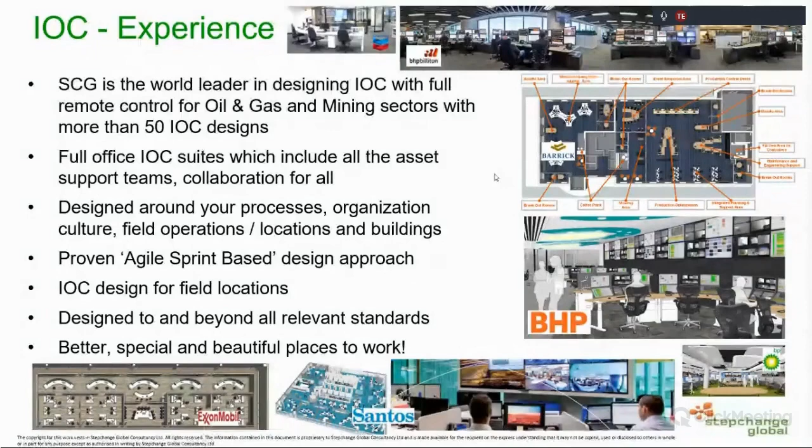I won't go through this too much, but we've done a lot of these centers globally, worldwide, a lot in Australia, a lot in North America. And as you can see, there's a number of them which are mining centers in BHP and Barrick. Some of these centers can be 1 or 2 floors with 200 people working in them. Some of them can be very small centers with 10 or 15 people in them.

At one end of the spectrum, they can cost millions of dollars, or even tens of millions of dollars. At the other end of the spectrum, they can cost as little as $100,000 or even less. In fact, the smallest one we've done is this one here with Huntley, for a company that currently only has three wells. So they've decided to set their entire company up around this concept.

So really, what is integrated operations, digital mine of the future, whatever you want to call it, digital transformation? Well, it's about taking these digitally enabled technologies—high bandwidth comms, Internet of Things, cloud, mobile worker, analytics, robotics, automation, etc.—and applying them to your day-to-day operation.

How do you apply them to production optimization? How do you apply them to asset integrity? How do you apply them to quality, water management—the normal day-to-day processes that you have when you're running a complex mining operation or a complex oil and gas operation? Really, they are enablers for things like operations excellence, production excellence, remote operations and management, collaborative working, and all those things that we do in a day-to-day operation.

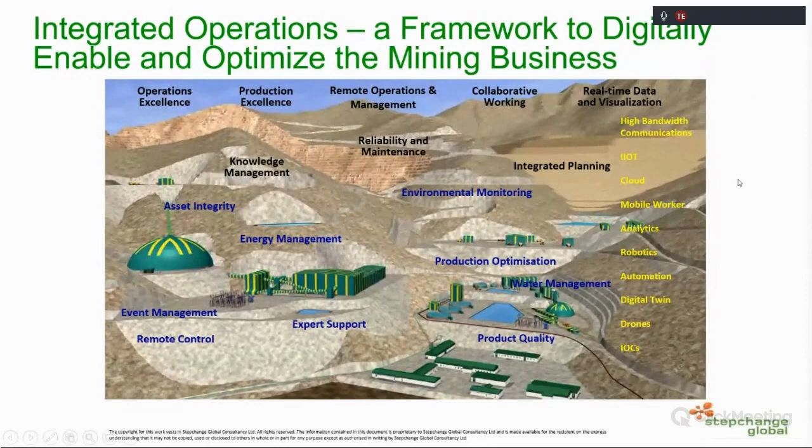But when you look at this and you boil it down, you say, well, what's fundamentally the change in the way of working that you have? That change in the way of working is a number of things. If you apply these technologies to an operation, and if you walked in through the door or visited the operational site, what would the changes be that you would notice?

One is that decisions—you're moving to a real-time or near real-time way of working, and decisions will be made faster rather than they would have been in a non-collaborative, non-data enabled operation. We would see that there is real-time connectivity between one or more remote sites and teams working together over geographical distances. So the geography goes away.

We tend to see that there's a move towards multidisciplinary team working, so that a production optimization team would be pit to port, and that is inherently multidiscipline, and those teams would be co-located with all of their data feeds, optimizing that production chain, and that really leads to value chain integration and optimization.

So what we see is it speeds things up, it connects remote teams, it moves towards multidiscipline, it integrates across the value chain. And this is quite a big change in the way of working for your people on the ground, who are often isolated in silos and not used to collaborating in this way. So that's why this is a change problem—it's not just a technology problem, it's a change problem.

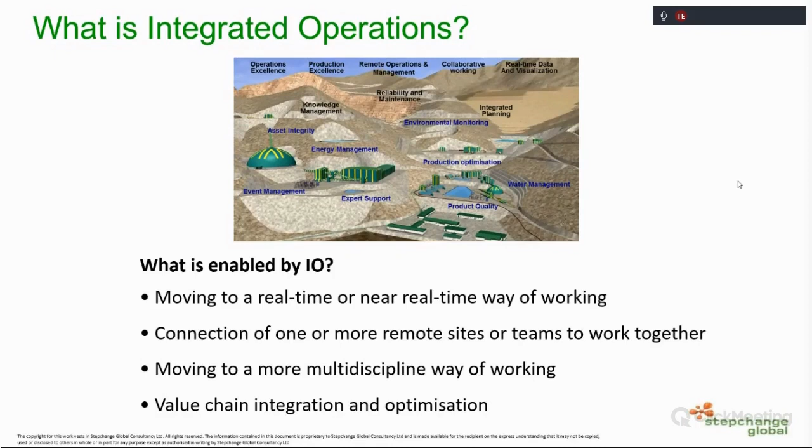What are the drivers and what are the enablers for doing this? Well, we see that the drivers are things like: mines and oil and gas are increasingly in remote locations where you don't have a lot of people to work there. There are particularly key skill shortages in certain areas. There's increasing technical and challenging nature of the operations and new developments.

Of course, you're trying to potentially grow your business, so how do you scale your business with the same number of people? You're looking for performance improvement, production efficiency, reduction of cost base, of course. You've got other things like high and low commodity price and the whole HSE and environment issue there, and that's driving us towards a digital type of operation.

And of course, the enablers are a whole lot of the technologies which I've already talked about. But we also see that an enabler is new supply chain management models, new operating models, new project concepts, and new organizational models. So we're beginning to see these integrated operation centers or integrated remote operation centers in mining, where the mine is remotely controlled and there's remote dispatch from a city center location, and that's a new operating model, and a lot of your processes then need to be changed for that new operating model.

We do see some similarities and some differences between oil and gas and mining. We see that in mining, it's often more about the value chain and integrating the production value chain, because many of the operating companies own the entire value chain. And so that's a big opportunity. There is a tendency towards full remote control rather than just operations and engineering support. Production planning is the key focus, and there's not a lot of condition-based monitoring going on as well.

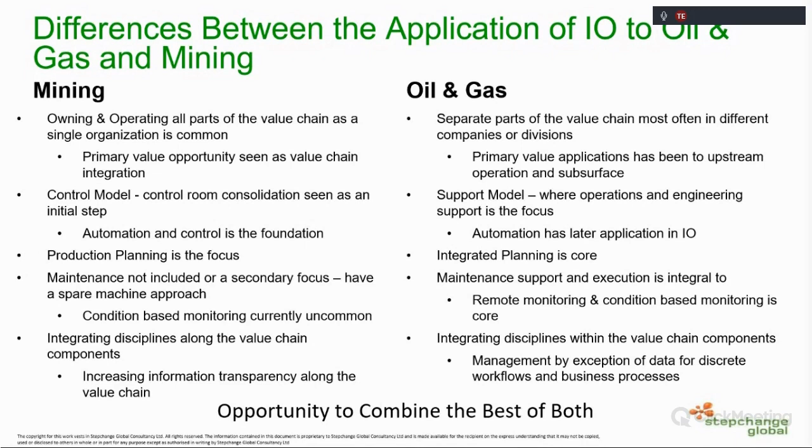We do see a lot of similarities. We see that oil and gas companies and mining companies are large, complex organizations. We see that they're often siloed. We see that there are barriers to implementing, cultural and organizational barriers to implementing these new ways of working. Doing things like production and maintenance planning is actually pretty similar. Both have turnarounds, for instance. There's a lot of focus on new technology in both. So we actually see that there's a lot that can be learned from mining into oil and gas, and from oil and gas into mining.

Where does the value come from integrated operations? With the application of digital technologies, we've got a lot of case studies on this, and we can talk to you about the sorts of value that we've seen others achieve. But conceptually, it happens from a number of things: real-time decision-making, faster decision-making. It's about including the best people in your decision-making, which is the connection of one or more remote sites. It's about taking that value chain integration approach and optimizing the entire value chain and not just one part of it. And it's applied to maximizing uptime, upset and event recovery, etc.

And we see that to do this, you need to focus not only on technology, but people, process, and organizational change as well. We've got a lot of examples where, particularly in the integrated operations centers area, the payback is typically 3 to 12 months, and usually it's within a year. And we've got a lot of examples of that we can share with you at a later date.

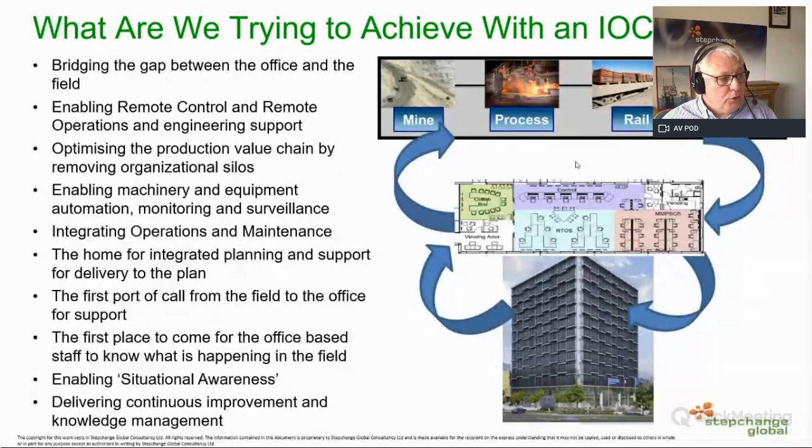Yes, good. Okay, so now I'd like to focus on integrated operation centers, and we believe that integrated operation centers is where a lot of these digital technologies come together. It's where the decisions are made. It's bridging the gap between the office and the operations in the field. It's about enabling remote control and remote operations and engineering support. It's about where the optimization of the value chain happens. It's about enabling, it's where a lot of these other technologies happen, like machinery monitoring, plant and equipment monitoring.

But it should also be the first port of call. One of the things we often see in operations is that there's no clear communications protocol between the guys in the field and the guys in the office, and it's kind of everybody talking to everybody. What the center does is become the conduit, the mainstream through which your communication happens. So it becomes the first place that the field comes to get help. It also becomes the first place where anyone in the office goes to find out what's going on in the field.

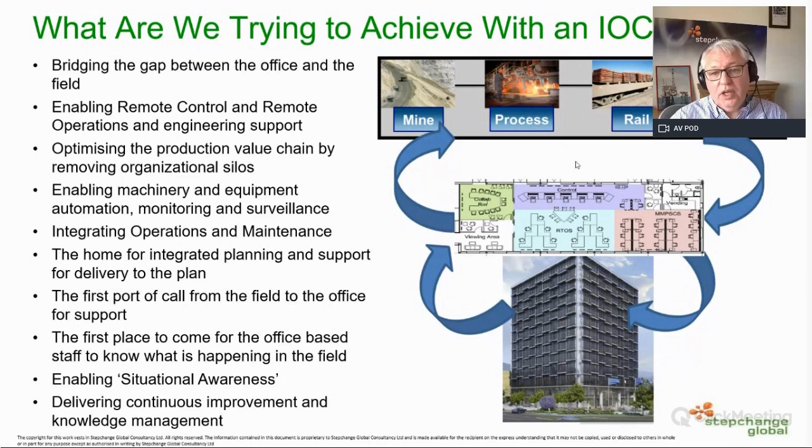And it enables this concept of situational awareness, so that the people in the office, in the IOC, have as much understanding of what's going on in the day-to-day operations as the guys in the field, or as much as they can have without actually being there. This is one of the key things we see, and why these integrated operation centers are now very common in oil and gas, and are becoming increasingly common in mining operations.

In terms of designing the integrated operations center, we develop a basis of design. We then do an IOC design, and of course there's construction, IOC move-in and go live, and this change management is almost continuous in parallel to this.

Now, this timescale to do this - we have seen it done very fast in small operations, where it can be done in probably 3 months, 10 to 12 weeks. Typically in a larger mining operation or larger oil and gas operations, you're talking 9 to 12 to even 15 months to go through this, if you're talking about a large center with a few hundred people.

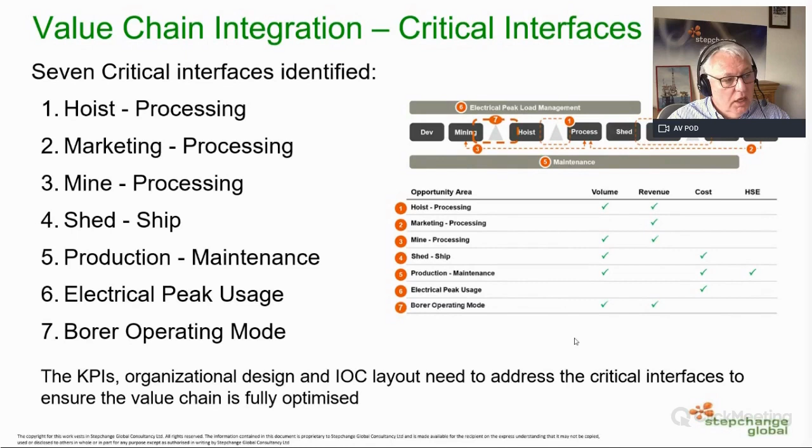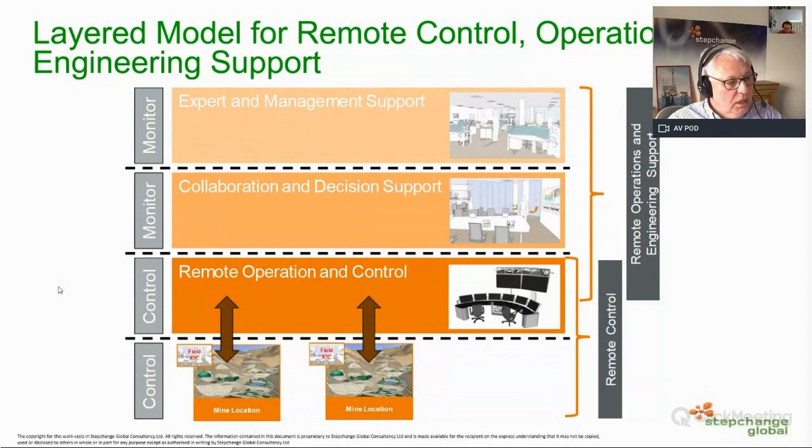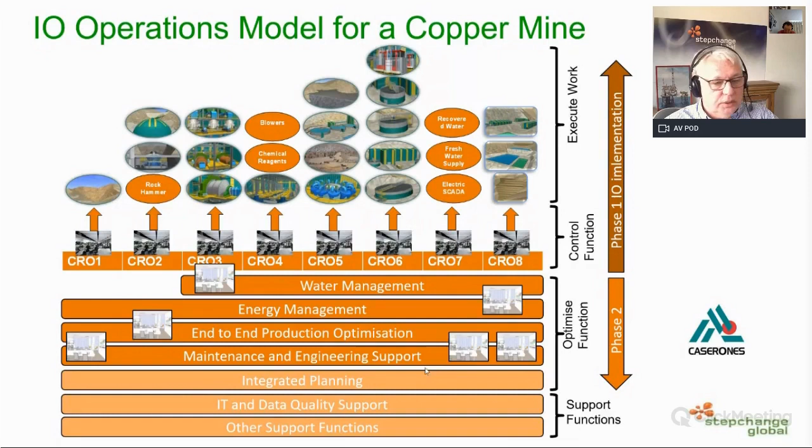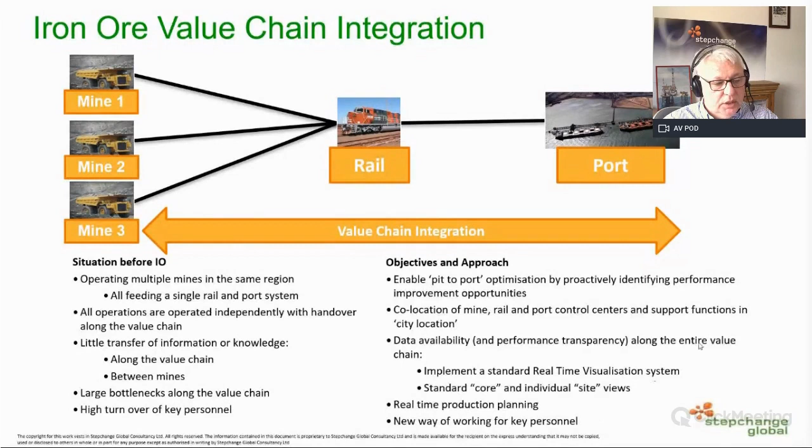When you go to the new model, it's about pit to port optimization, looking at the value chain, standardizing your processes and procedures. Interestingly, it's also a way of recruiting and keeping your best personnel. One of the drivers for having these centers in Perth rather than at mine locations was actually being able to retain and attract the right people.

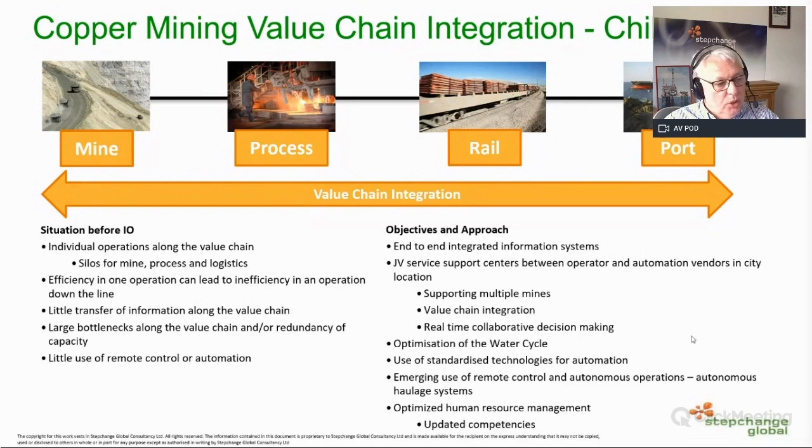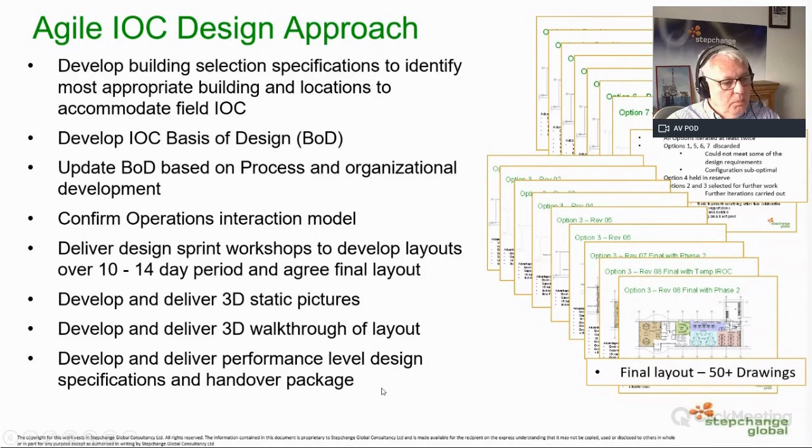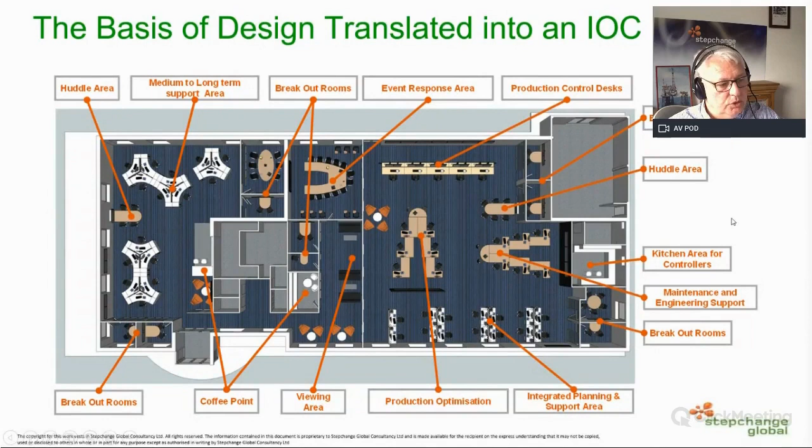A little bit about some of the implementations we did. This is the first piece of work we did in mining, which was for BHP IROC in Perth. We actually got asked to come in and do an assurance piece of work - they had a big project team designing and implementing this, and we got asked to come in. We took one look at the layout of the design they'd done and said this won't work, and then we were asked to redesign the layout.

What you see here is each of these green horseshoes is a mine - 1, 2, 3, 4 mines. You've then got a rail area, and a port in and port out. The pink guys are the mine management team, and the purple guys are integrated planning. So the actual layout of this center reflects the geography in the field and the fact that you've got 4 mine assets, a rail asset, and a port asset.

Interestingly, the value case, the business case for this center was 1 extra train of iron ore every month, at 4 to 5 million in value per train. By the end of month 5, they were doing 1 extra train of iron ore every 3 to 4 days. This centre paid for itself in less than 6 months, quite easily. And by the way, this was done in 2013 without analytics and without a lot of the latest technologies - it was just looking at lifting and shifting the current systems and co-locating them in the room.

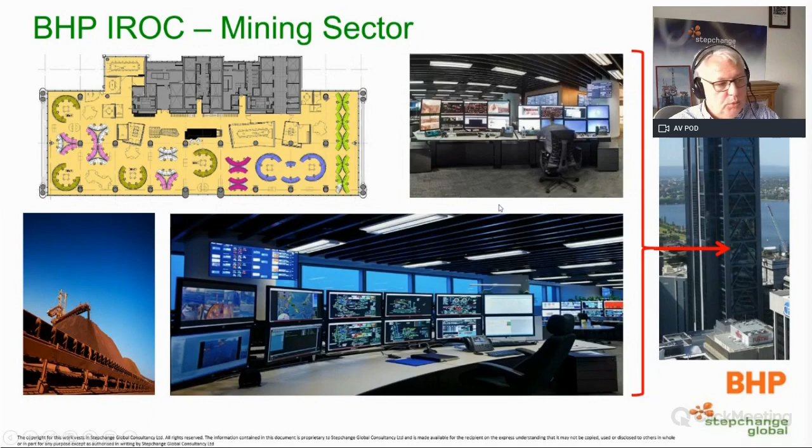I'm conscious I need to move on. This is the centre we designed for BHP Escondida a couple of years ago. It's now been up and running for just under a year. These are pictures of it from when I was there last year when it was being commissioned. What you see here is 24 control desks for Escondida, plus all the production optimization, planning, and support.

And then this one is the Spence mine. This is how we take the initial basis of design, which we come up with internally, and translate it into what you see here.

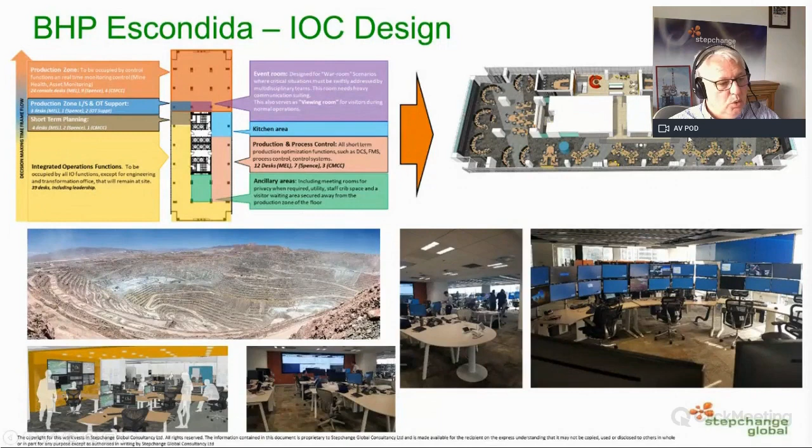This is the latest one we've done in Chile, for Teck Resources' QB2 mine. We actually got asked to help select the building, which was good - we selected a really great building with the core on the outside. If you look at this one, the core's in the middle, so it's hard for these guys over here to collaborate with these guys over there - there's no visual connectivity. In this one, the core's at one side, and we did this layout. This one's currently under construction.

What you see here is every role - there are approximately 98 roles on the floor. Every role has got a location, and we know exactly why every role is sat next to which person. We're at that level of detail after running workshops for 2 weeks. As you can see here, there's a lot of breakout and huddle rooms.

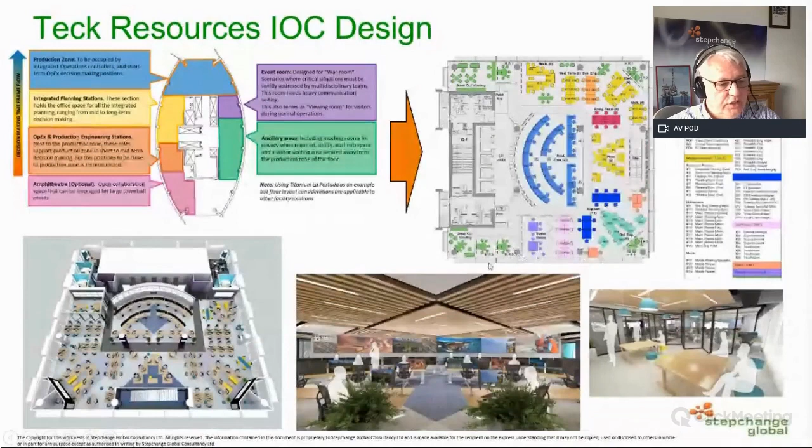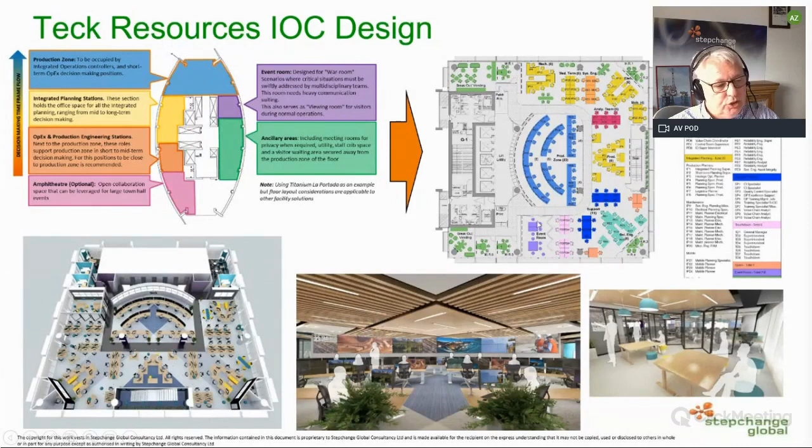These are the 3D visualizations we've got, which just show what it's actually going to look like. Control areas in the middle, then we've got mechanical maintenance and planning, medium-term maintenance, systems engineering, electrical maintenance, mobile maintenance, production, and here was reliability engineering. So every team has got a specific space that's designed for them.

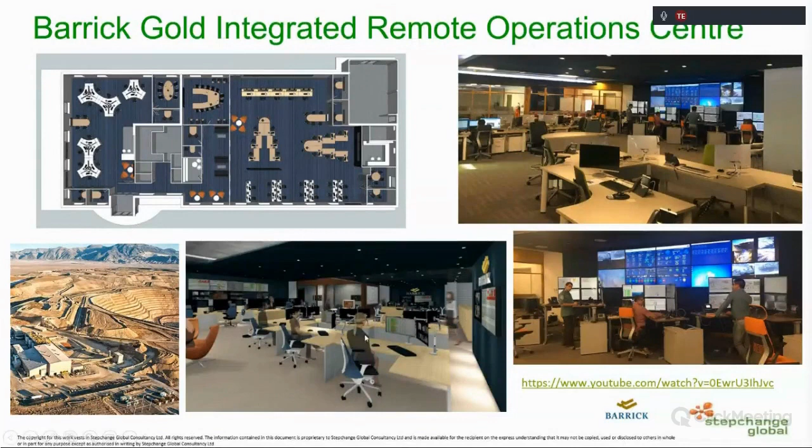Again, this is the Barrick Gold one - a smaller IOC for a gold mine in San Juan, Argentina. I won't say too much about this one, but if we could go to the video, please, that would be great.

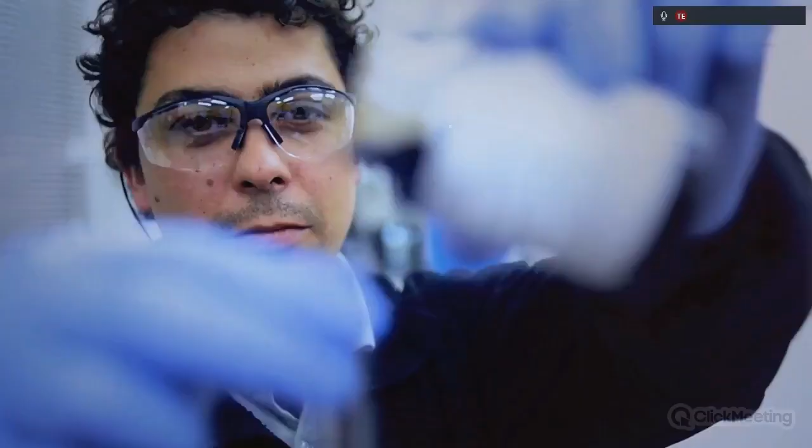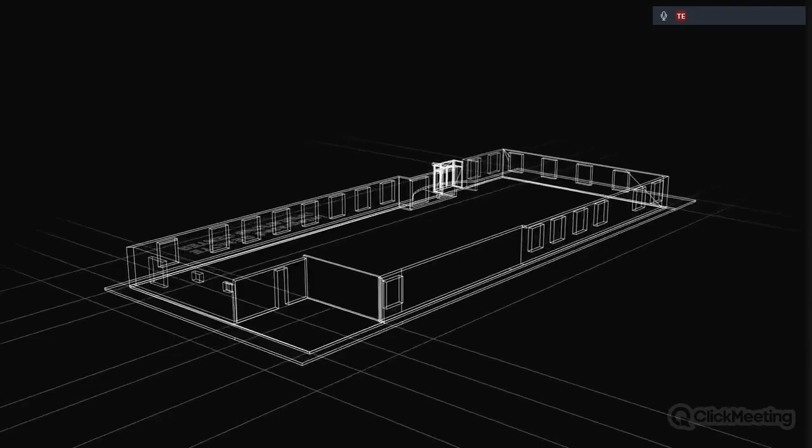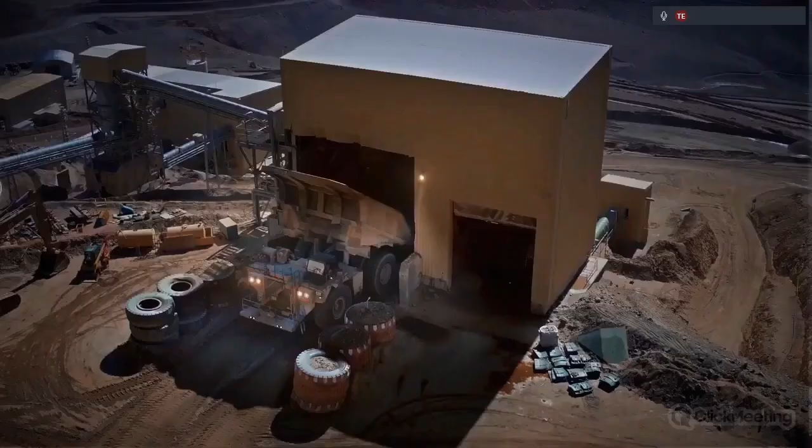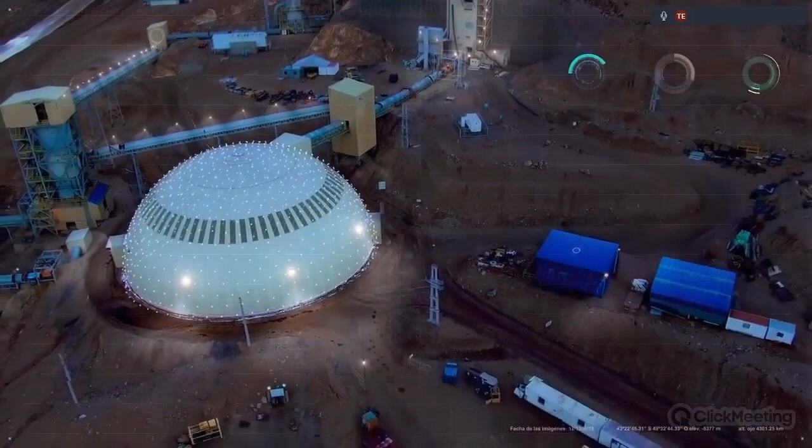Bridging the gap between your mine and office, continuous field support, real-time monitoring, and advanced analytics. Welcome to the future of mining. Welcome to Veladero's Integrated Remote Operations Center in Albardón, San Juan Province, Argentina. The IROC symbolizes the new mainstream model of mining. Collaboration, combined with the latest in mining innovation, transformed this facility into a truly advanced center for the integration of mining and advanced data analytics. A demonstration of our commitment to investing in innovation in the region, the IROC is the first of its kind in the company, developed by San Juan for Argentina. The remote monitoring model enhances our capacity to anticipate events, allowing us to maximize production while reacting faster to changes in the field, providing confidence in our strategic decision-making capabilities. The IROC positions San Juan to pioneer innovation and mining development in the region. Our success will ensure mining continues to be a positive force for economic development in the province for the foreseeable future.

Thank you. And if you can just switch back to my slides - that video is available on YouTube, by the way, if you want to go and look at it. What you can see there is that company putting the IOC at the center of their digital enablement program. It's where the decisions are getting made.

I'll just very quickly go through a few others. Here's a US midstream oil and gas operation - we designed this center 5 or 6 weeks ago. Again, it's got a full control capability plus all the operations and engineering support, and you can see that all of the different desks are colored for different teams.

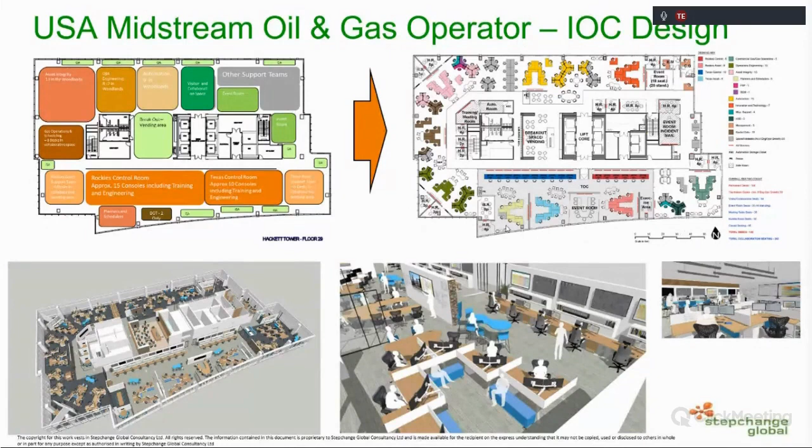Again, this one took 80 or 90 drawings and was designed over a 2-week period. This is a much smaller one, different scale. This is actually Repsol for a shale gas operation.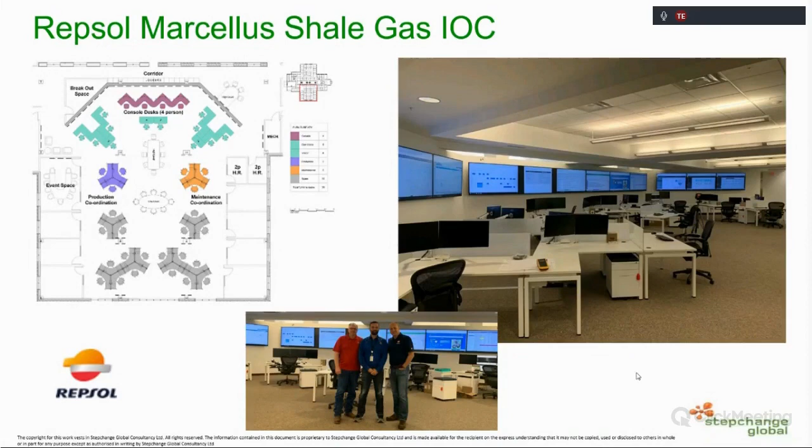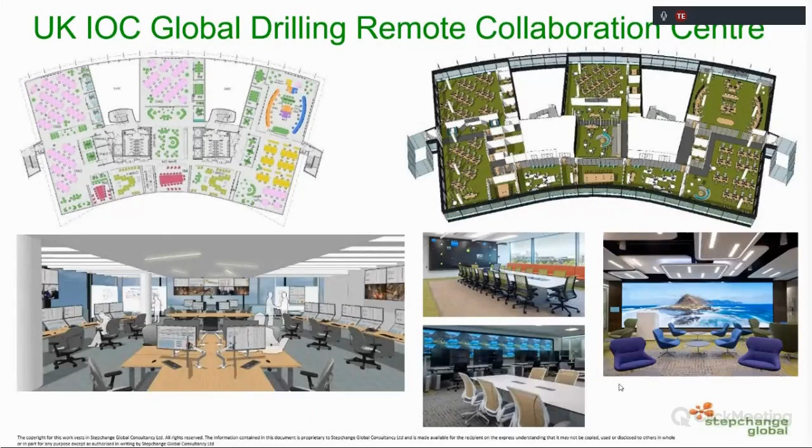In Pennsylvania, the total cost of this project was about $200,000 to get fully implemented and up and running. This is a UK-based global drilling center, a large center with all the drilling and well delivery people on board, monitoring all of the wells globally, worldwide.

Here's some smaller ones we've done in oil and gas over different periods - one's in Malaysia, a couple in Canada, some in Australia, one in Trinidad. The ConocoPhillips one paid 3 times its cost back in 1 year. The total cost was 4 to 5 million to implement, including the IT systems, and it paid back $15 million worth of value in year one.

The one in the top left-hand corner, you can probably see where my cursor is - you can see some people briefly with blue shirts. Those people are actually sat in the middle of Australia, and this centre is actually in Adelaide. So one of the things we do is try to make people think they're collaborating together in the same room.

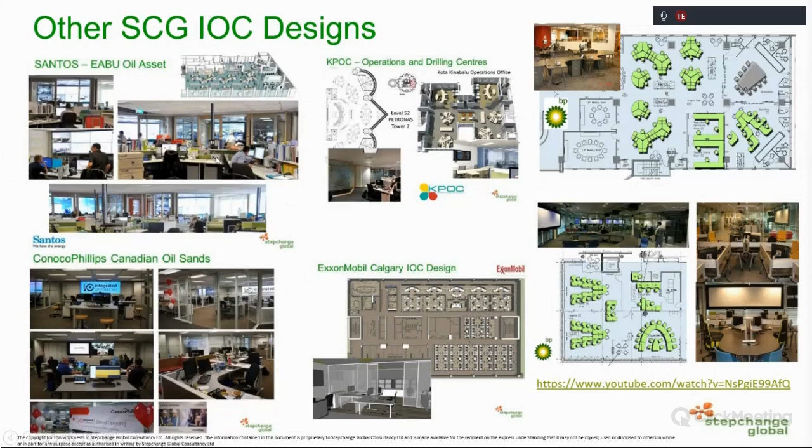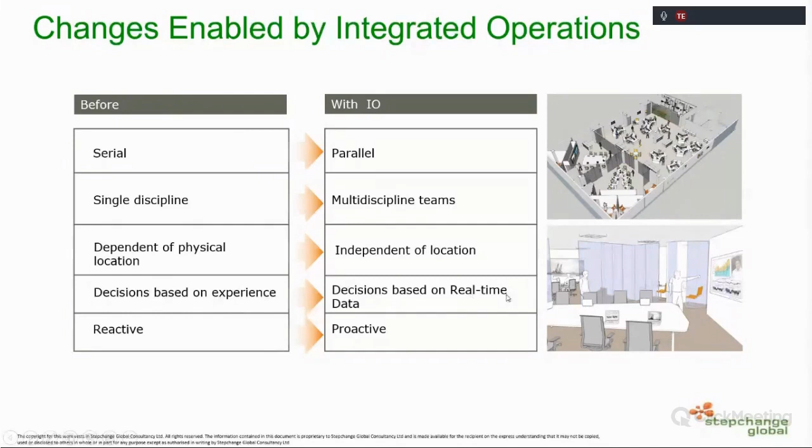Just a couple more slides to go. The changes we see with integrated operations and digital enablement - you move from processes which are serial to being more parallel. There's a tendency to move from single discipline to multidisciplinary teams. Work becomes independent of geographical location, or a lot of it does. Obviously the physical work you do in the field still needs to be done there. You have decisions based on real-time data and experience, not just experience, and it becomes more proactive rather than reactive.

Many operational sites will be minimum manned at the moment - there'll be less people there, people working remotely, people supporting from home. So how do you make that the new sustainable operating model? How do you challenge the work done at the operational site so you can move towards people only being at the site if they wear a hard hat and swing a spanner and do something physical? So we see that remote and integrated operation centers are a key enabler.

We've been busy working with companies, trying to understand how they can capitalize on what is clearly a crisis, but what might be a pilot or a lesson for the future that we can get out of this.

Just some conclusions. If you're going to embark on digital transformation and integrated operations, one of the key learnings is that this is an organizational transformation - it's not a technology or an IT project. The companies which are successful think about it this way, and in fact think about it as a continuous improvement process. This is not one size fits all.